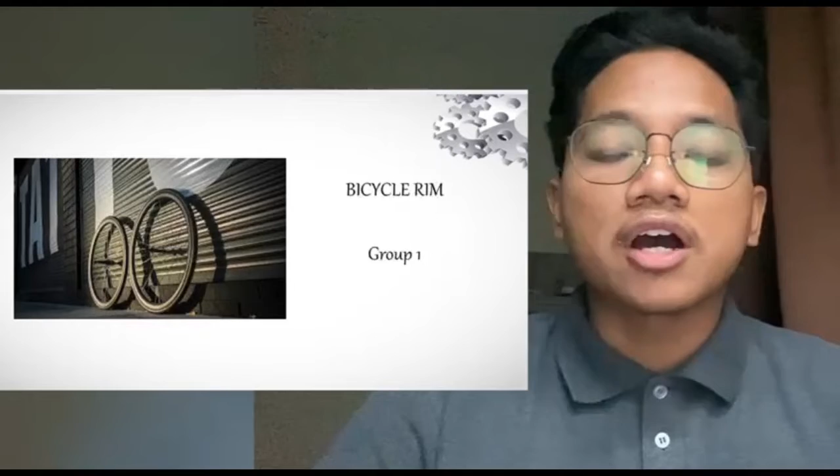Assalamualaikum, my name is Muhammad Azim. Over these two weeks, I have been assigned to discuss the most suitable manufacturing process for bicycle rim. I'm going to present about process selection and process flow.

First, I chose aluminium as the material because aluminium has a lower price, yet is very strong and durable. Also, it is very light compared to other metal.

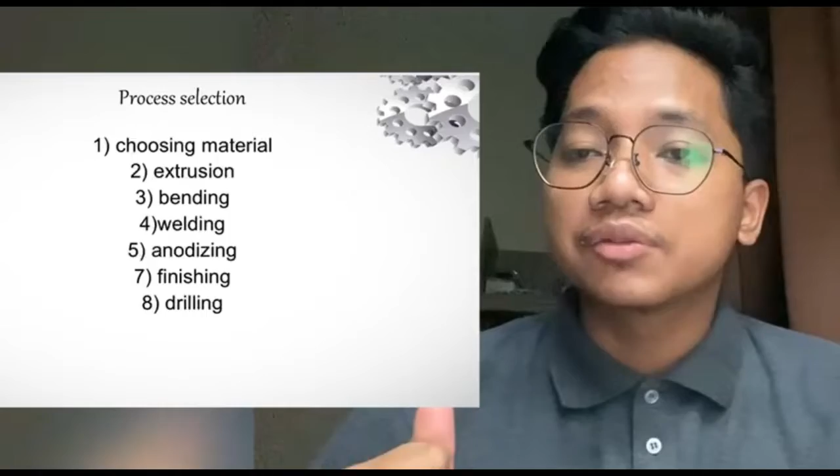The second process is extrusion, specifically hot extrusion. I chose hot extrusion because large deformation can take place without fracture, as the material is under high triaxial compression. First, the material comes from an aluminium billet, and then it is extruded to form something like this.

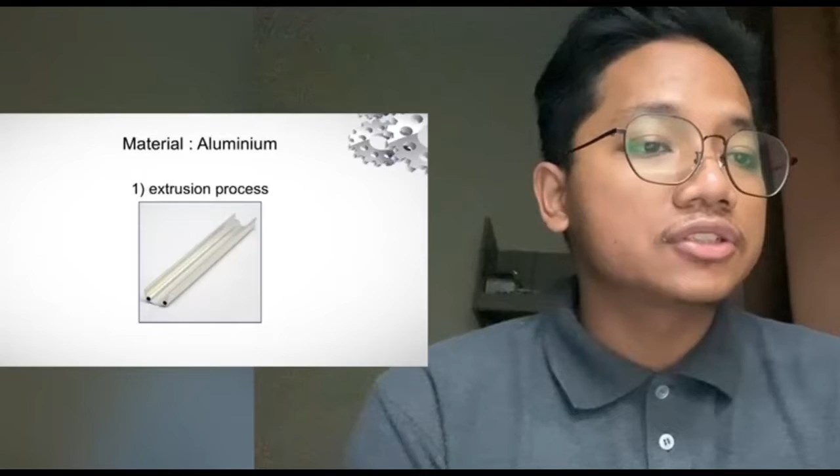The second process is bending, using the ring rolling technique. We use ring rolling to make the extruded aluminium, which was previously straight in shape, become circular. So after bending, the aluminium will be circular.

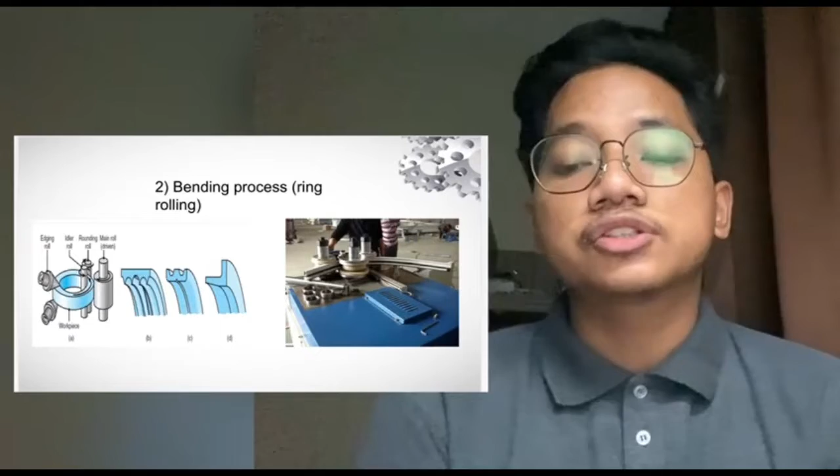It also has short production times. It also saves material and has close dimensional tolerance.

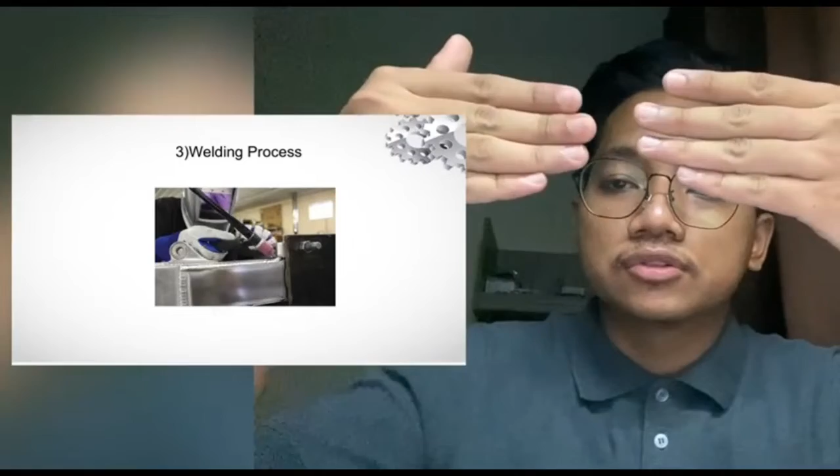The third process is welding. Because after ring rolling the material will be separated, welding is used to join the metal to form a bicycle rim. In this welding process, we use GTAW, also known as gas tungsten arc welding, because the material is aluminium. So GTAW is suitable for the welding.

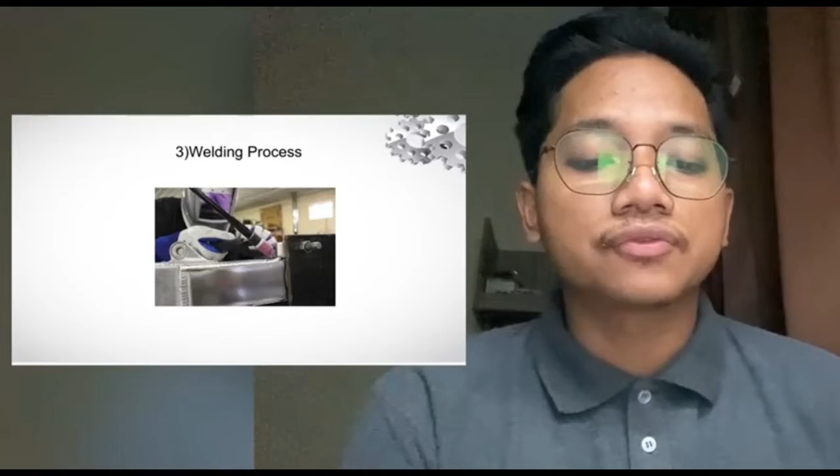The fourth process is anodizing. Anodizing is used to change the color of the bicycle rim. The color from anodizing depends on the time consumed in anodizing and the electrolyte used in the process.

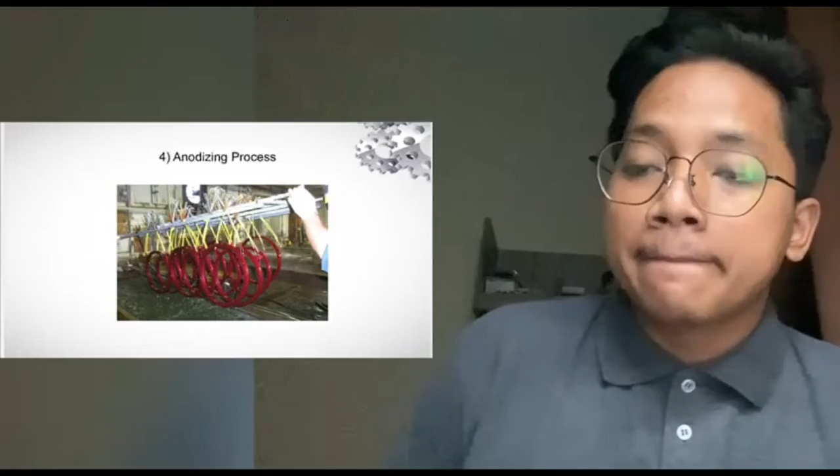Why do we need to anodize the bicycle rim aluminium? Because it increases corrosion resistance, as anodizing is like a thin coating around the material. As we know, bicycles are used in extreme terrain and conditions, such as when it is raining or at the park, so the chance of the material experiencing wear and tear is very high. Anodizing reduces this risk.

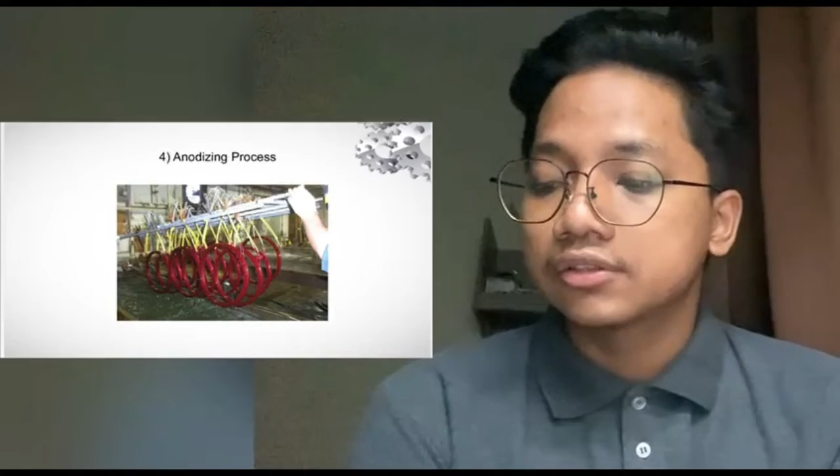The next process is the finishing process, which makes the surface smooth. It also ensures that the tire that fits into the rim fits perfectly without any looseness, so the air in the tire will not lose pressure. The previous welding process creates rough edges around the bicycle rim, so the finishing process is used to smooth the surface.

The last process is drilling. This drilling process ensures the spoke can enter the bicycle rim. The spoke supports the weight of the bicycle and the cyclist. Drilling is also quite important, because if it is not centered perfectly, the weight will be distributed unevenly. So the drilling process must be drilled precisely.

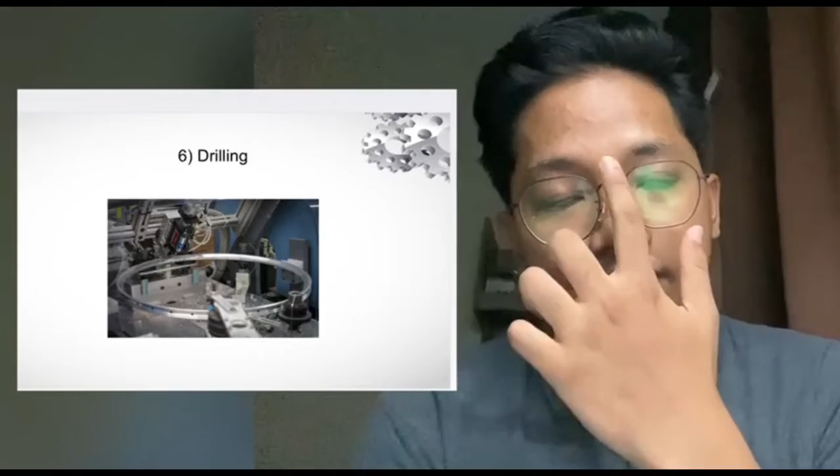Why spoke instead of a normal rim? Because spoke is light in weight and also saves a lot of money in the cost of making.

Okay, now is my part. These are the advantages of the process. For design flexibility, sand casting is excellent for prototypes and jobs that might require flexibility in both size and weight. The only size and weight restrictions are the amount of material available and the size of the foundry.

The second advantage is large material choice. There are many different casting materials, and as long as the alloy can be melted, it can be used to create a product with sand casting. Low production cost: equipment and tooling costs are generally much lower than those associated with other metal manufacturing processes, making sand casting one of the cheapest methods to make this bicycle rim.

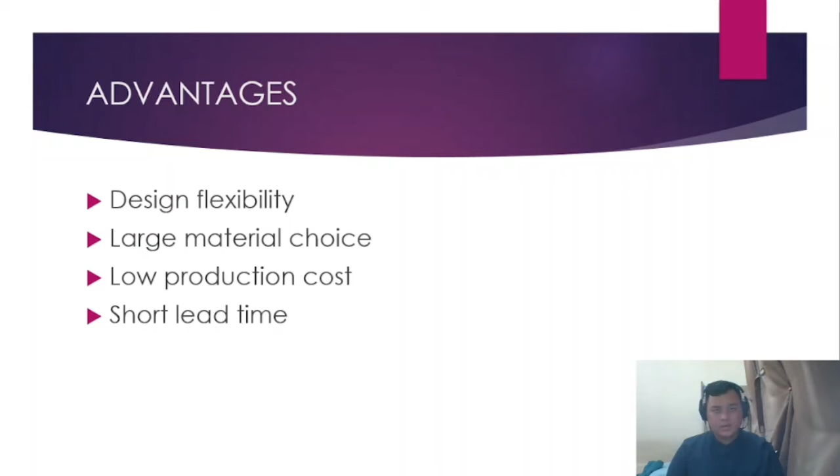Short lead time means the production time to make the product is much faster, making this one of the fastest forms of casting.

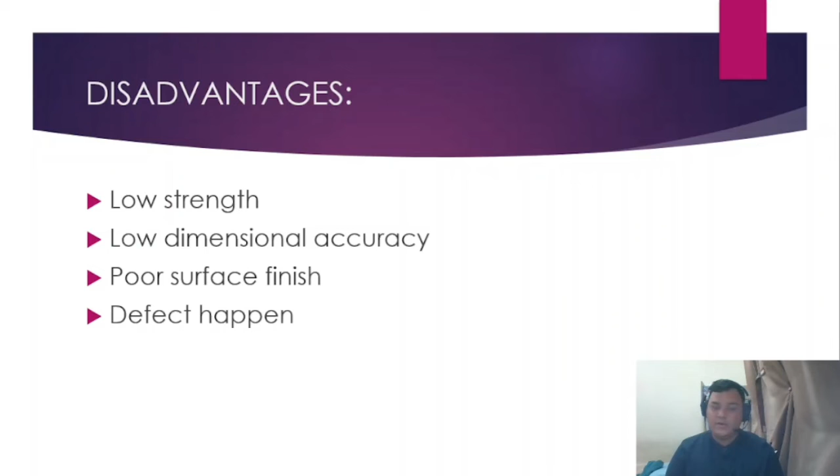Now the disadvantages. First is low strength. Sand casting is excellent for prototypes that might require flexibility in both size and weight, but this process has low strength, low dimensional accuracy, poor surface finish, and defects always happen with sand casting.

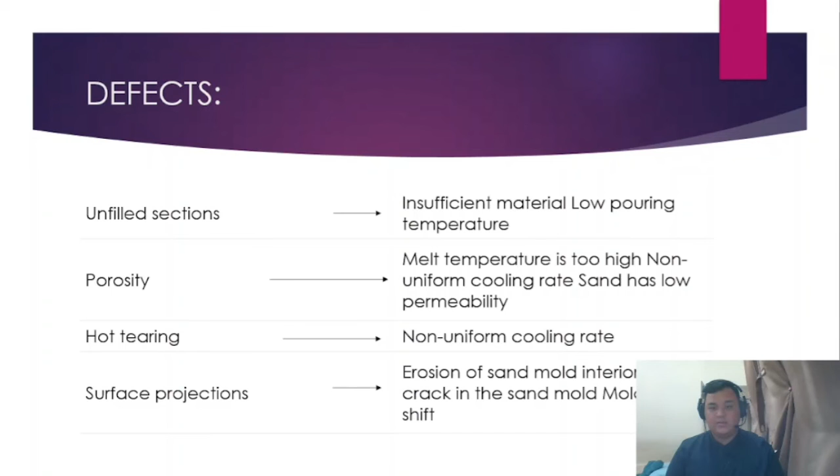These are the defects. The first is unfilled section, meaning insufficient material or low pouring temperature. The second is porosity, caused by melt temperature being too high or non-uniform cooling rate. Sand has low permeability, causing hot tearing, non-uniform cooling rate, and surface projection, erosion of the sand mold interior, and cracks in the sand mold, mold shift.

Then the last one is safety. The first and most important is wearing eye protection. The second is that the sand must be clean before we start the working process. The third is that a clean and dry mold is required, and the metal added to the heat must be free of moisture and impurities, to prevent our metal from having any defect at all.